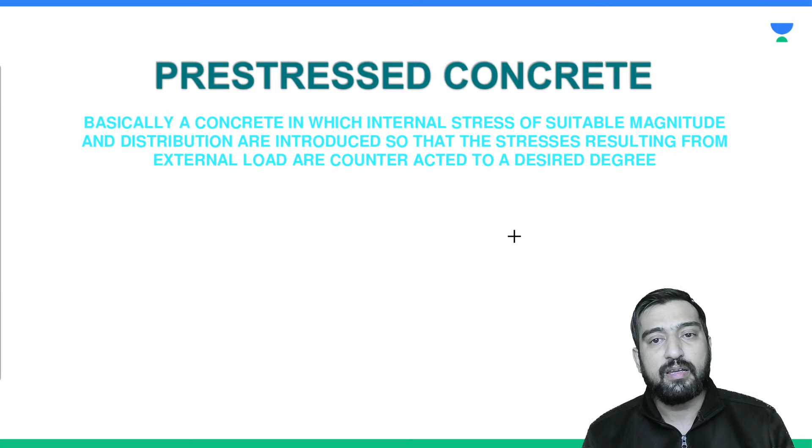So in order to resist such tension, okay, or you can say in order to effectively use your normal concrete, the concept of pre-stressed concrete is introduced. Already we are doing a pre-stressing in such a manner that even if the external loads come, the initial stresses are going to counteract up to a desired degree. So this is a concept here.

Now, why pre-stressed concrete when we have already our RCC structure? I told you, in RCC structure, in WSM as well as in LSM, the concrete in the tension zone is completely neglected. Yahi bataya tha bhi maine.

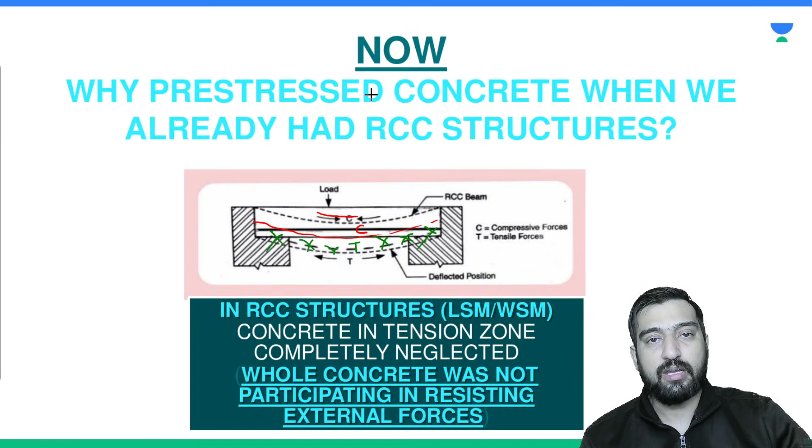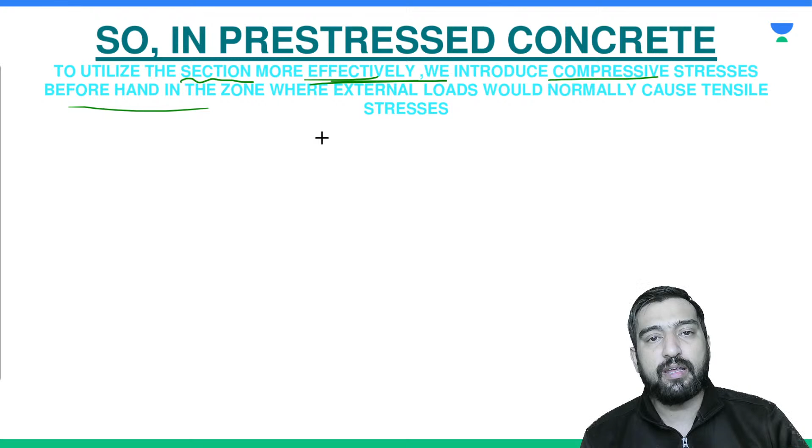I hope the concept is clear to you guys. Okay, so we can say that in pre-stress concrete, in order to utilize this section more effectively, we are introducing the compressive stresses initially, before the loading, where the external loads would normally cause the tensile stress. So we are going to compress that portion of concrete which would be in tension due to the external load. So by doing this, we are using our RCC in a more effective manner.

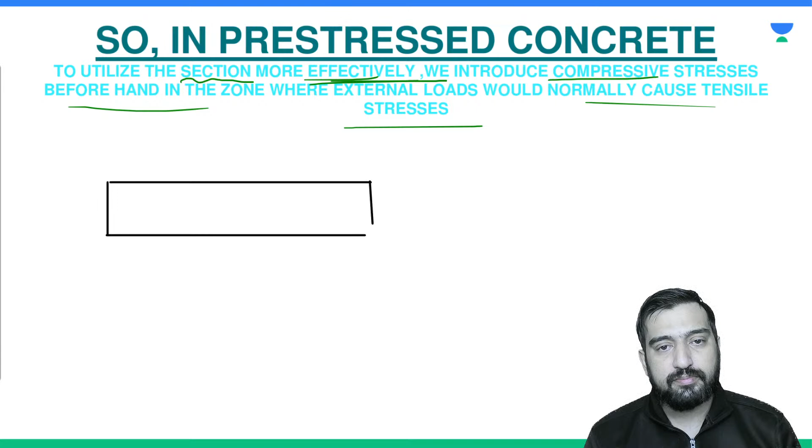So tell me if the basic funda of pre-stressed is clear to you or not. Aise samajh lijiye ki ye mere paas normal steel section, concrete section hai. Okay, already it is compressed.

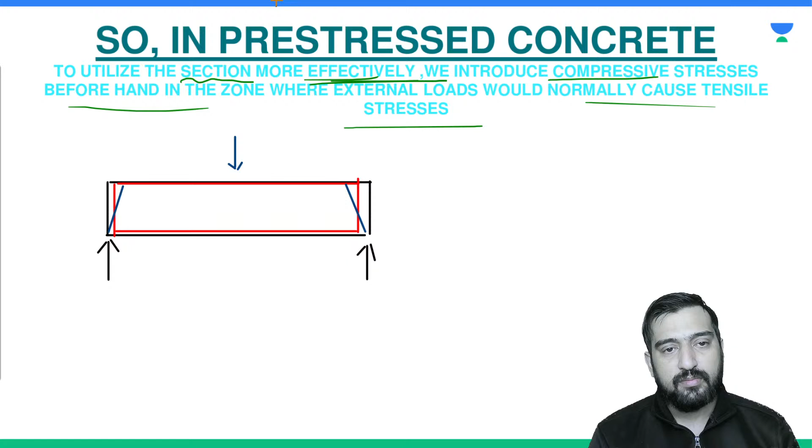So the revised position of this would be maybe like this. Okay, if I am going to compress it from the center, now when the external load came, so due to the application of external load, now the deflected pattern may be like this. So still it is going to reach at this level. So we can say that no net stresses are developed even now. So this is the beauty of pre-stressed concrete.

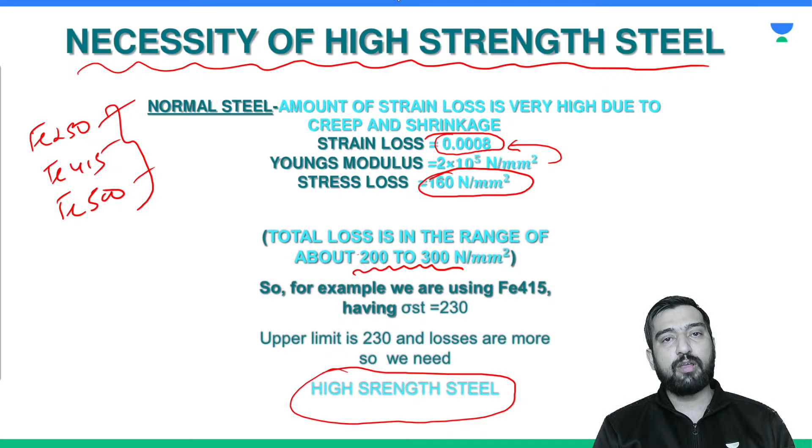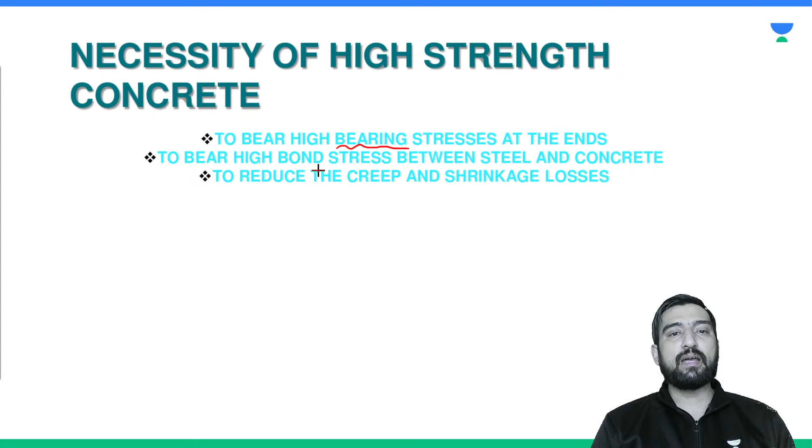So in order to bear the high bearing stresses at the ends, we need high strength concrete. To bear the high bond stress between steel and concrete, we need high strength concrete, because as we are increasing the grade of concrete, the bond strength also increases, the bearing stress is also increasing, and as the grading of concrete becomes higher, the losses due to shrinkage creep also reduce, because Young's modulus increases and the material which has high value of Young's modulus is less prone to creep and shrinkage losses. Okay, so to reduce losses due to creep and shrinkage, to bear high bond stress, to bear high bearing stresses, we will be needing high strength concrete.

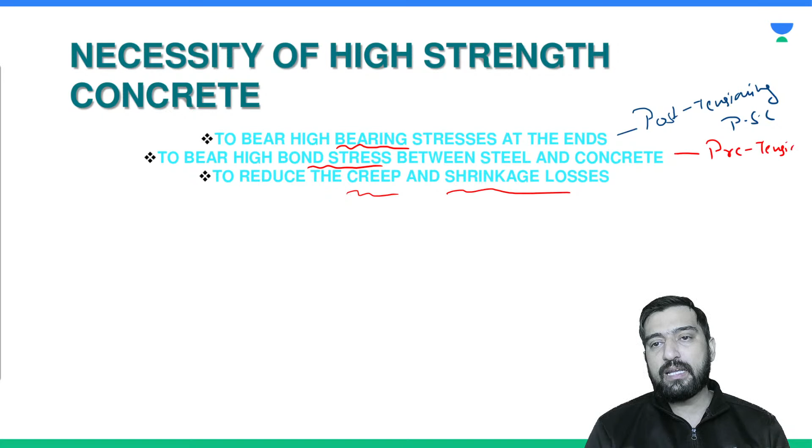पोस्ट टेंशनिंग में हम कंक्रीट कास्ट करने के बाद उसको स्ट्रेस देंगे, और प्री टेंशनिंग में हम कंक्रीट कास्ट करने से पहले ही ऐसा अरेंजमेंट करके रखेंगे कि मेरा जो कंक्रीट है उसमें स्ट्रेस आ जाए. आर यू गेटिंग द पॉइंट और नॉट?

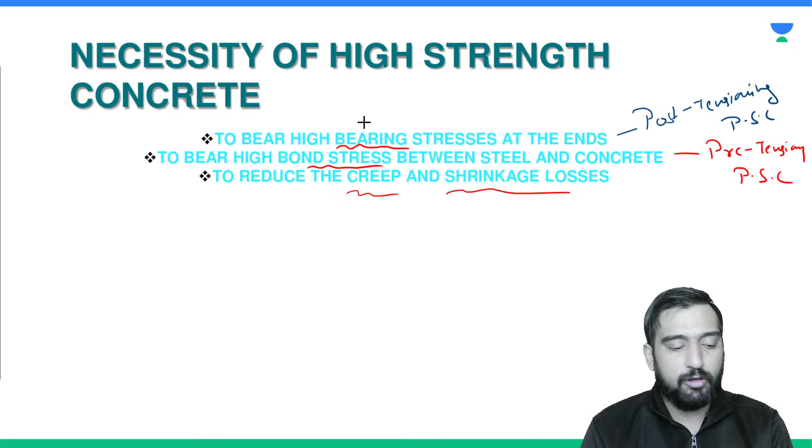ओके, सो लेट मी एक्सप्लेन यू द टाइप ऑफ प्री स्ट्रेसिंग. एज आई टोल्ड यू देयर आर 2 टाइप ऑफ प्री स्ट्रेसिंग. पहला है प्री टेंशनिंग प्री स्ट्रेसिंग, और दूसरा है पोस्ट टेंशनिंग प्री स्ट्रेसिंग. नाउ व्हाट इज द डिफरेंस बिटवीन प्री एंड पोस्ट? एज आई टोल्ड यू, प्री में आप पहले से ही कंक्रीट को टेंशन देने का प्रबंध करके रखोगे, और पोस्ट में आप कंक्रीट कास्ट करने के बाद उसको खींचोगे.

ओके, लेट मी एक्सप्लेन यू इन मोर डिटेल मैनर व्हाट इज हैपनिंग इन प्री टेंशनिंग. पहले आपने 2 एंड से वायर कनेक्ट करी, अब इस वायर को आपने दम के खींच दिया. देयर इज ह्यूज स्ट्रेन स्टोर्ड इन दीज स्टील वायर्स, ऑल्सो नोन एज स्टील टेंडन्स. सो नाउ आफ्टर स्ट्रेचिंग योर वायर, ये वायर कैसे स्ट्रेच करोगे?

आप इसको एंकर कर दोगे, या हाइड्रोलिक जैक लगा करके वायर खींचोगे, वायर को पुल दोगे, पुल करने के बाद इसको आप एंकर कर दोगे. अब ये वायर आपकी एकदम स्ट्रेच्ड है.

अब जब इसके ऊपर आप कंक्रीट कास्ट करोगे, इसके ऊपर जब आप कंक्रीट कास्ट करोगे, और कंक्रीट कास्ट मल्टीपल कर सकते हो, जितना बड़ा आपका प्लांट है उतनी लंबी वायर्स. एंड ये तो मैं आपको सिर्फ एक व्यू दिखा रहा हूं. देयर विल बी वायर्स बिहाइंड वायर्स बिहाइंड वायर्स. सो n number of sections you can plot in on a single batch.

So after casting the concrete, what you need to do, you need to cut this wire. If you are going to cut this wire, then what would happen? Steel will try to contract itself, and due to the good bond action between steel and concrete, the surrounding concrete also gets contracted and compressive stress is stored in your concrete.

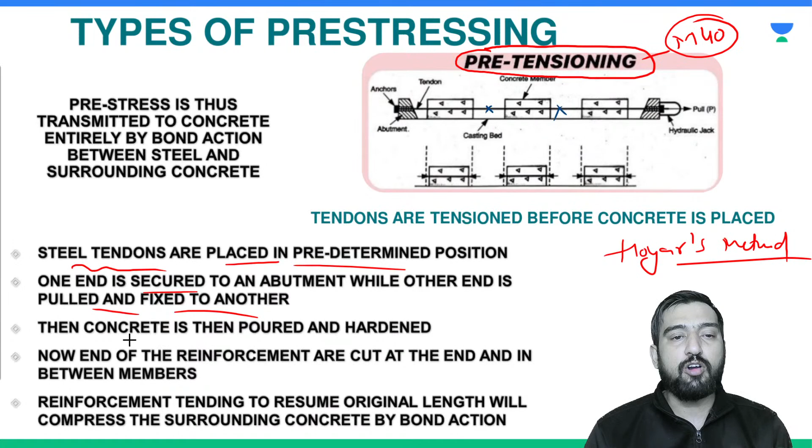Okay, so these are some salient points of pre-tensioning pre-stressed concrete. Here the steel tendons are placed in predetermined position. One end is secure and another end is pulled and fixed to another. Then after, the concrete is casted. So you can also define it pre-tensioning because you have stretched your steel wire before the casting of concrete. That's why tensioning procedure have taken place earlier than that of the casting of concrete. So that's why it is pre-tensioning, मतलब पहले से ही tensioning करके रखी हुई है.

So after pre-tensioning, your concrete is casted, then wires are cut, then they are contracted due to the good bond action. Okay, is it clear? So after this, the reinforcements are cut and then they are trying to resume their original length, and due to the bond action between steel and concrete, the surrounding concrete will be compressed by the bond action. So that is the concept here.

Okay. Now the procedure in post-tensioning pre-stressed concrete is different. From name itself it is clear that here first of all you are going to cast your concrete, but whenever you are going to cast your concrete you will be placing some space in between. How you can place a space in between?

आपने घर बनते हुए देखा होगा, आप क्या करते हो, होल करके जब लेंटर डलता है, जब छत डलती है तो आप पहले से ही इलेक्ट्रिसिटी वायर्स के लिए पाइपिंग वगैरह डाल देते हो. जब आप कंक्रीट कास्ट करोगे तो आप पहले से ही अपनी डिजायर्ड लोकेशन पे पाइप वगैरह फिट कर दोगे, एंड दीज आर नोन एज डक्ट.

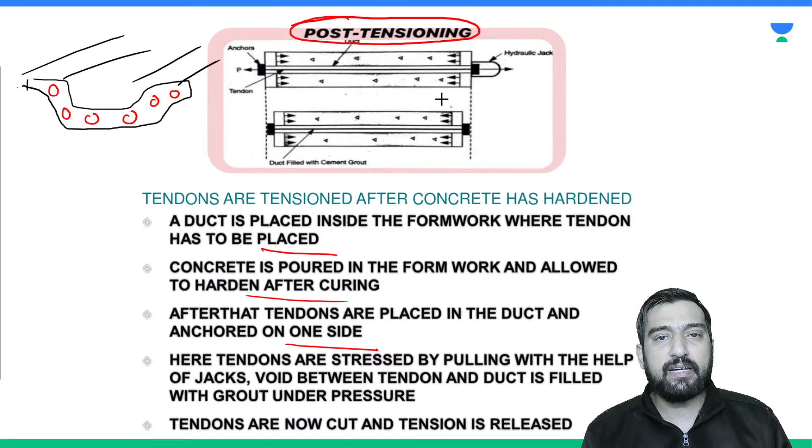So here, instead of M40, you can even plan for M30, because M30 is the minimum requirement here, since M30 also provides you the desired bearing strength. But in pre-tensioning, the entire game is set up based on bond action. So we need good bond, and bond stress generally increases, but it is not as high as bearing strength. That's why we use minimum M40 there, and the code has set M30 as the criteria in post-tensioning.

Is it clear to all? Ram Singh, did you get your example? Tell me.

So here the tendons are stressed by pulling with the help of jacks. Voids between the tendon and duct are filled with grout under pressure. After that the tendons are cut and released. This is the procedure of post-tensioning.

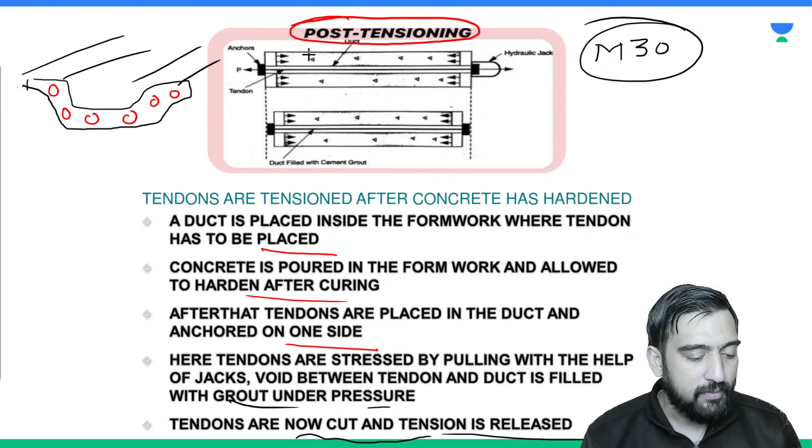So the key point is, in post-tensioning, wires are placed after the casting of concrete, and then we apply the tensioning process. Here, pre and post are relative with respect to the casting of concrete. If tensioning is done before casting, it is pre. If done after casting, it is post. So pre and post represent the time period, and the reference for them is the casting of concrete. Is it clear to everybody?

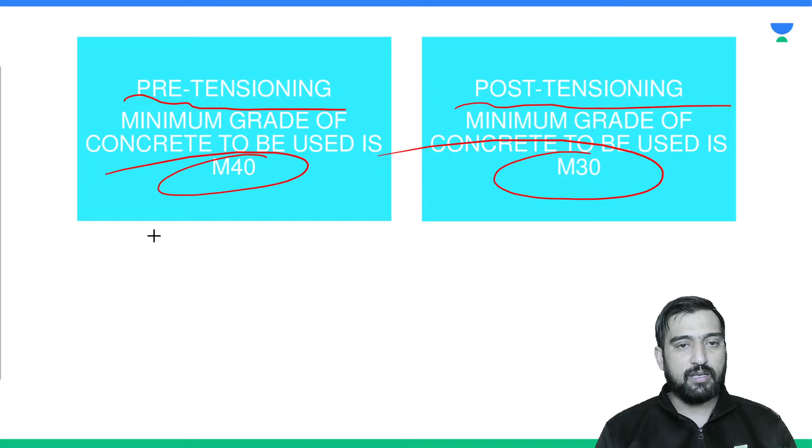Now, as I told you, in pre-tensioning we use M40, and in post-tensioning we use minimum M30. If somebody asks what is the minimum grade of concrete used in pre-stress technology, you can say M30. But if somebody asks what is the minimum grade of concrete in pre-tensioning pre-stressed concrete, then make sure the answer is M40. So read the question very carefully - this exact same model has been asked twice in the past.

Is it clear? Now, what are all the advantages of pre-stressed concrete? The very first advantage is it utilizes your cross section more effectively. In fact, most of the time the entire cross section is utilized, whereas in LSM and WSM, you have observed that the concrete area under the neutral axis in the tension zone is to be neglected from the strength point of view.

So that concrete is fully utilized here. If the entire concrete is utilized, then in order to resist the same load, less area of cross section would be required. If less area of cross section is required, it will reduce the weight of the structure, it will reduce the dead weight of the structure.

If the dead weight of the structure is less, then the cost of the supporting structure like your columns and footing will also be reduced.

And generally deflection is the challenge. We have seen in marathon session 2 that in slab and beam we do a deflection check. So normally we do not provide a very long span of a structure in RCC, especially in case of cantilever or simply supported.

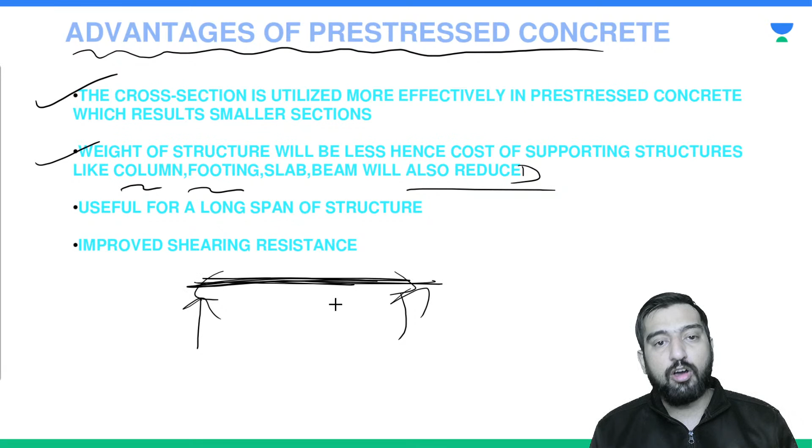You will see that the spacing between two pillars, two columns, is wider as compared to a normal RCC bridge, because here you can go with a longer span. Here you can go with a longer span.

Is there any other category to select minimum grade like mild, moderate, severe here as well? Ankit, yes, those things are mentioned, but for that we have to read a separate code, 1343.

That much is not part of our syllabus. In fact, I have also never been through that code.

But there should be, and we have to see the minimum grade as per the bond action as well as the bearing action. So from that, logically we can define why the value...

...of concrete is higher in pre-tension pre-stressed concrete rather than in post-tension, because in post-tension bearing is the criteria, and in pre-tension bond is the criteria.

Okay, chaliye. So it is also useful for long spans of structure, and also you can get improved shearing resistance.

It is also quite common. Like, suppose there are two objects. Suppose there are two objects like this.

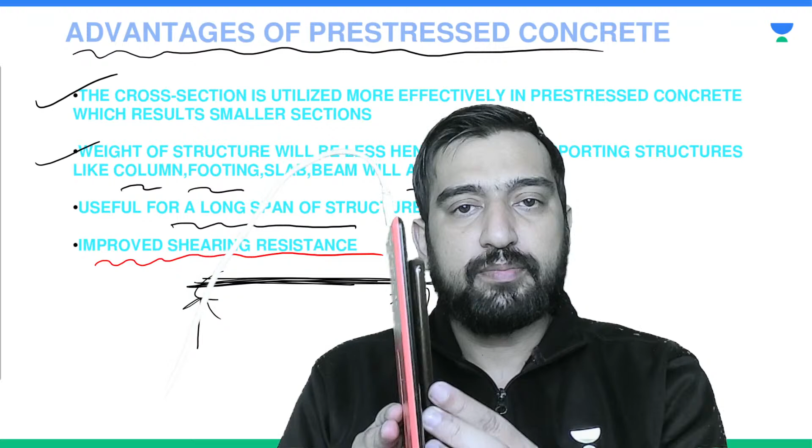Suppose there are two objects. You can see the relative displacement between two objects, if they are normally held together.

But suppose if both of these members are compressed now, I have applied a compressive stress here. Then do you really think now the relative movement is easier? So as you are increasing the compressive strength, then automatically the shear, the tangential displacement or relative displacement between two sections, it will also be improved.

So as you are increasing the grade of concrete, the shearing resistance increases. And in case of pre-stressed concrete, whenever there is confinement, the shearing strength would be more enhanced.

So that is the reason why we can say that pre-stressed concrete sections are more good, pre-stressed concrete sections are more good in taking shear.

You can also justify it from the Mohr circle, that in the first case it is like this, and now in the second case it is like this. So here you can see that the shear strength of the concrete member is more whenever it is already compressed. So that is the case.

So this is the advantage of pre-stressed concrete over RCC. Although I am not telling you the disadvantages, but disadvantages are also there.

Machines and tools are expensive, the labor we need is skilled. So all these are also disadvantages of pre-stressed concrete. Are you getting the point or not?

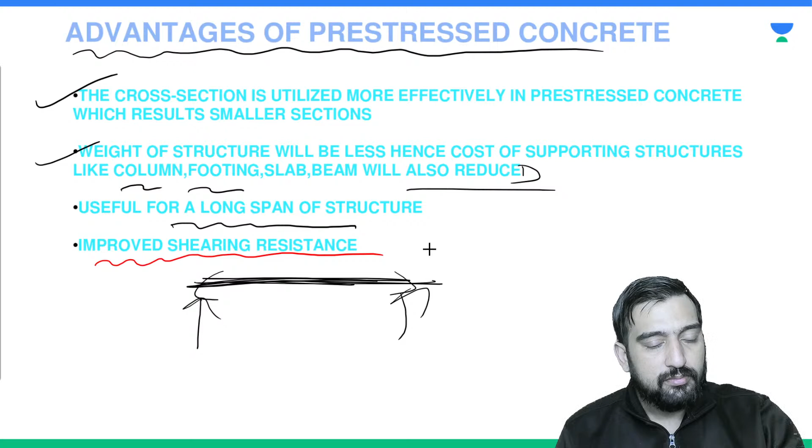Okay, now we have to start analysis. So this is the basic introduction. In the basic introduction we have covered what all are the advantages, what is pre-tensioning, what is post-tensioning, and why...

...do we need high strength grade of steel and concrete. So these things we have covered in the basic introduction portion.

Now for analysis, before starting we must be familiar with - sir, if we have to choose from pre or post, which one has more strength? Dear Ankit...

...not pre or post, we can say both are relevant, that's why both techniques are used very much. Okay, but it is...

...as per the project. Like, you can play more in post-tensioning pre-stressed concrete.

When I said you can play more, it means you will be able to counteract the stresses the way you want in case of post-tension pre-stressed concrete. That is why that is used. But whenever you need sections in bulk quantity, like I told you the example of railway sleepers...

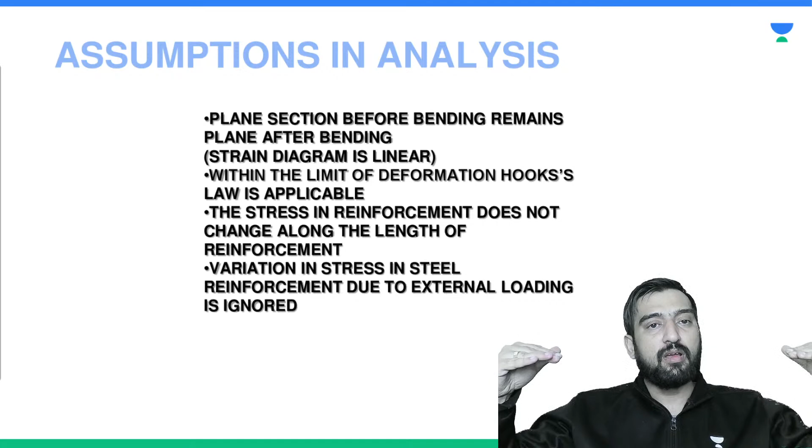Whenever you need a pre-stressed member in bulk quantity, you go for the pre-tension technique, because the tension is already there and you are casting the concrete, so you can get n number of similar members at once. But in pre-tension pre-stressed concrete, most of the time the wire is straight. In post-tension pre-stressed concrete, we can give the wire in the required shape. There is also an effect of shape - the difference is there whether you provide wires in a horizontal, triangular, or parabolic manner. They all become more and more significant. Such things you can easily do in post-tension pre-stressed concrete, that's why it is relevant.

It is also a function of the wire - how strong your wires are. Suppose I have a concrete which wants to compress, but the wires are not capable enough to produce that much compressive stress or strain. In that case the combination is ineffective. So not only on the basis of concrete, but as a system we have to judge which is going to give more strength. And anyone can give more strength, let me tell you.

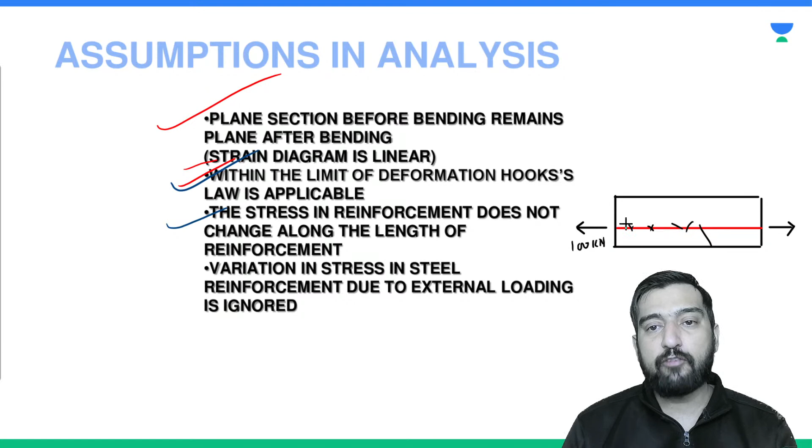and this is P, let's say 1000 or 100 kilonewton. So this 100 will not remain 100 here and here, because due to the frictional loss and many other kinds of losses, this value would be decreasing. If I am going to pull it from both ends, then this loss would be maximum at the center. If I am going to pull it only from one end, then this loss is going to be maximum at

the other end. The earlier case is known as jacking from both the ends. This case is known as jacking from single end. But assumption says that if it is 100 applied here, then we have to consider it same at each and every position. And one more thing, whenever you are going to apply a load here,

it is going to deform. If it is going to deform, then what happens? This wire would be stretched. Due to the stretching of this wire, again there is some gain of strain, and due to that gain of strain, gain of stress may also be there. Anyway, we are also going to ignore that.

So same thing they have written, that the variation of stress in steel reinforcement due to external loading is ignored.

Nowadays precast buildings are being constructed in some cities. If this pre-stressed concrete has to do something in such kind of construction.

Yes, Ram Singh. Generally they use beams of pre-stressed concrete. Precast buildings are just like your steel sections. You already had rolled section in your factory, and on site you are only doing assembling. So this precast buildings are also taking the help of pre-stressed concrete.

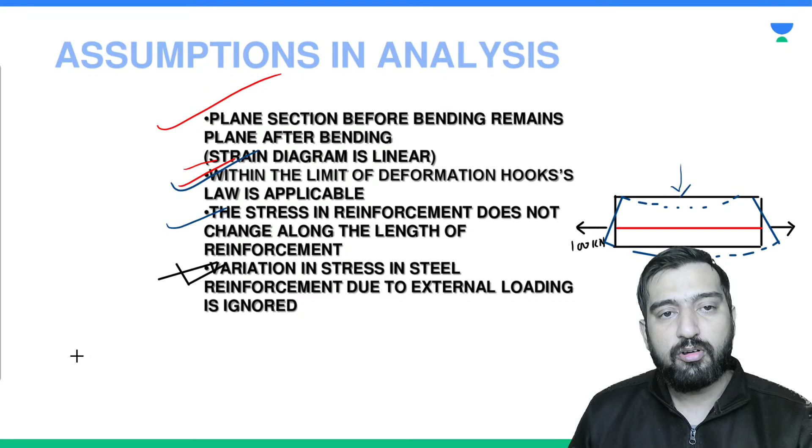The designer will ask that I need a beam of this much capacity of this size. So they are simply preparing those individual segments at some other location based on your request, based on your dimensions and all, and you are simply assembling them or keeping them at your site. This is just to increase the rate of construction or reduce the pollution involved or reduce the disturbance to the surrounding. Is it clear?

So now the analysis method. Total there are three types of analysis. One is stress concept, another is load balancing concept, and third one is P-line C-line method.

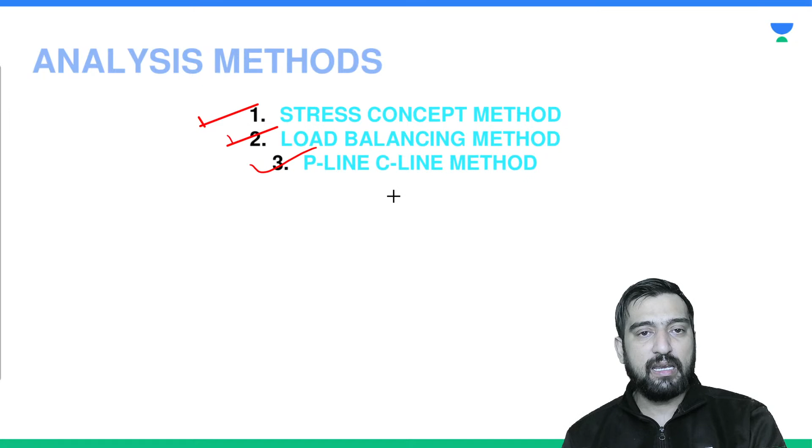I will suggest you go for all these three methods. But anyway, if you have to select any one method that you want to learn analysis only by a single method, then I will recommend you to go for load balancing concept.

Stress concept you all know. I taught you in column, in SOM as well, how to deal with the stress concept, but instead of load, here the moment would be generated due to the pre-stressing force. Also try to learn the load balancing concept here, and P-line C-line method also we will be seeing.

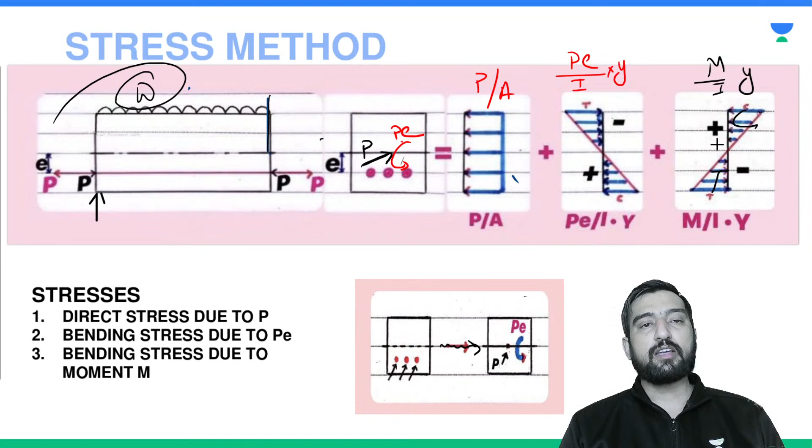So now when you have to obtain the net stresses due to all pre-stressing as well as dead load and live load, you can check the final stresses at top and bottom fiber by this expression: P by A minus plus Pe upon I into Y, and due to bending moment it is plus minus M upon I into Y. This minus plus or plus minus is with respect to this diagram, because tension is there due to pre-stressing force above the neutral axis and compression is there due to the external load above the neutral axis. So compression is plus here and tension is minus here. Below the neutral axis, compression is due to pre-stressing and tension is due to external load. So these are the final stresses at top and bottom fiber.

Okay, so this is the case. Now the second concept is the load balancing concept. From the name itself it is clear that here we are going to balance load. The changed eccentricity of your wire is going to be compensated with the help of an equal, or balanced, load. So how are you going to rectify this eccentricity? First of all, stretch your wire and make it horizontal.

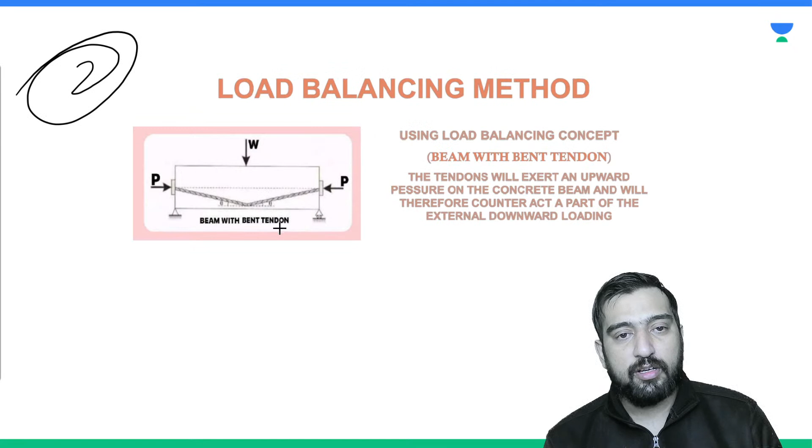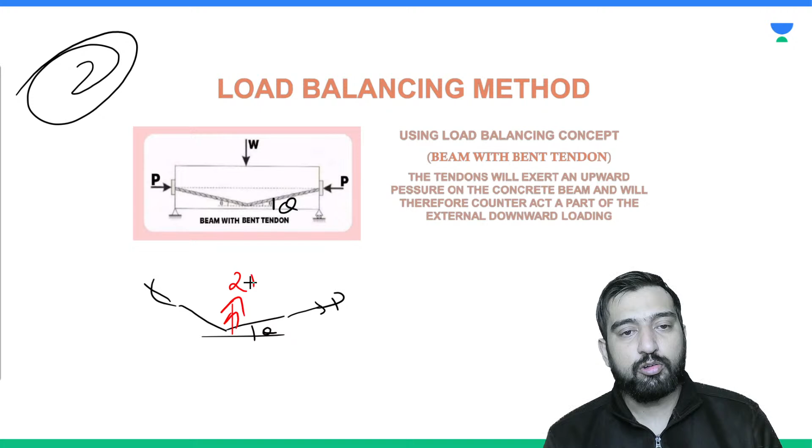What is 2p sin theta? If this angle is theta, and here it is p, and here it is p, then from mechanics this force is p sin theta, and from here as well this force is p sin theta. So total it is p sin theta plus p sin theta, which is 2p sin theta. So if you are going to make this wire straight, an equivalent load of 2p sin theta is going to come.

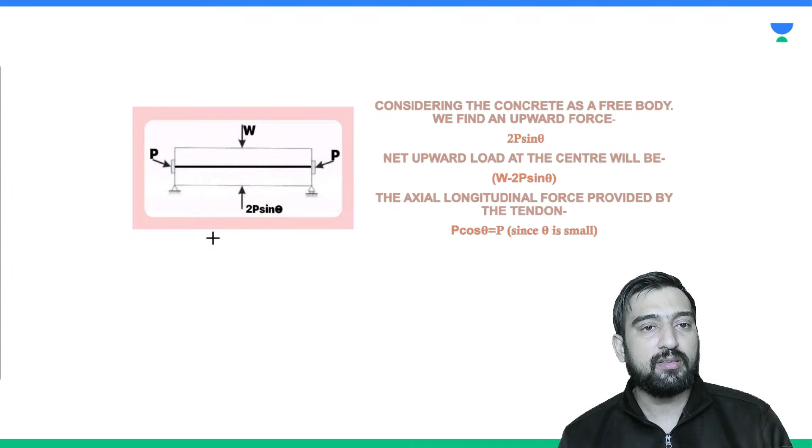So now, what you have to do is repeat the same procedure as in the stress method. But whenever you are calculating the external load now, earlier you were calculating the bending moment only due to external load, but now also account for this 2p sin theta in your external bending moment, and the rest of the procedure is the same.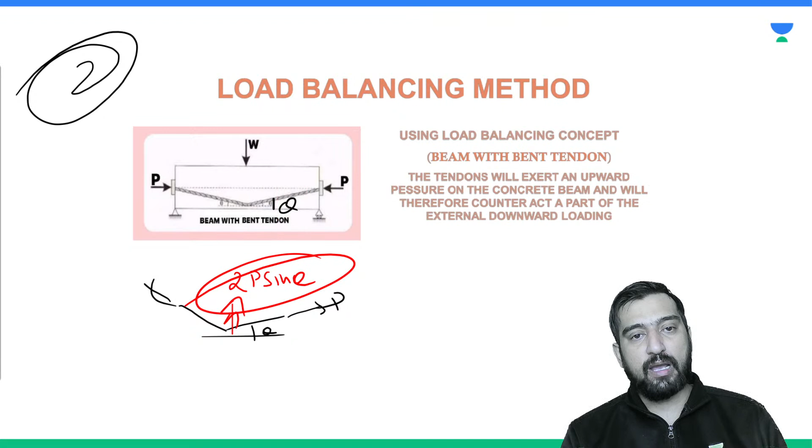So you may ask, sir, what is the benefit of this method? The benefit is, if it is a triangular profile and you analyze it with the stress method, the eccentricity keeps changing cross section by cross section. But when you make this profile straight, you get rid of eccentricity. Only this 2p sin theta, a vertical load, accommodates with the external load, and you will be able to calculate the net bending moment, and the rest of the procedure is the same.

But suppose if it is a parabolic variation instead of triangular, then in order to make this parabola horizontal, you need to provide an upthrust in the form of UDL. So it is very easy.

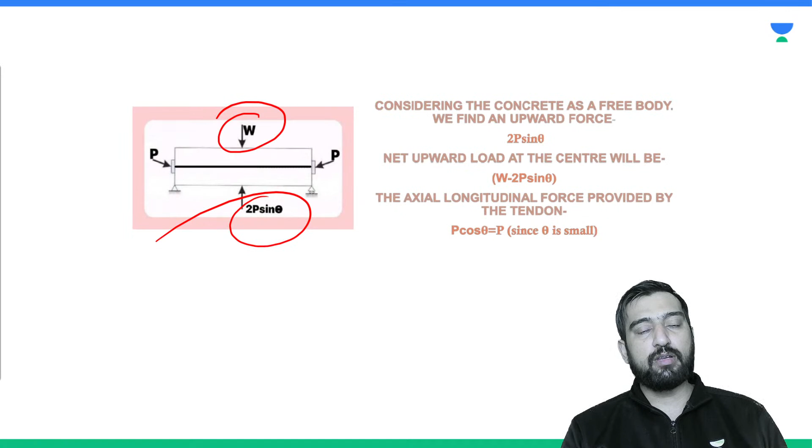Like for a point load, we have a triangular bending moment diagram. So if you are going to remove this bending moment, you need to apply an equivalent load. Like for a UDL, we have a parabolic bending moment diagram. So if the parabolic profile is to be removed, you have to apply some UDL. So what should be the intensity of this UDL? It is also very easy to calculate.

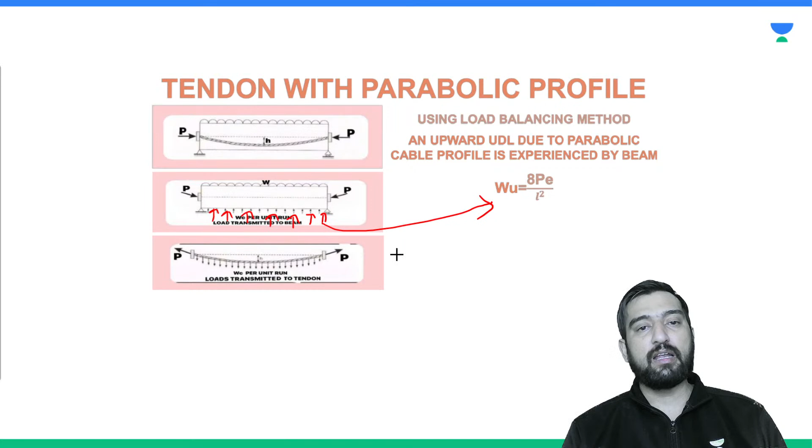Suppose if this is a UDL, what is the maximum bending moment it would produce? It would be WL square by 8. Suppose it is going to compensate your P into e. So what is your P into e? This is going to be the bending moment due to the external pre-stressing force.

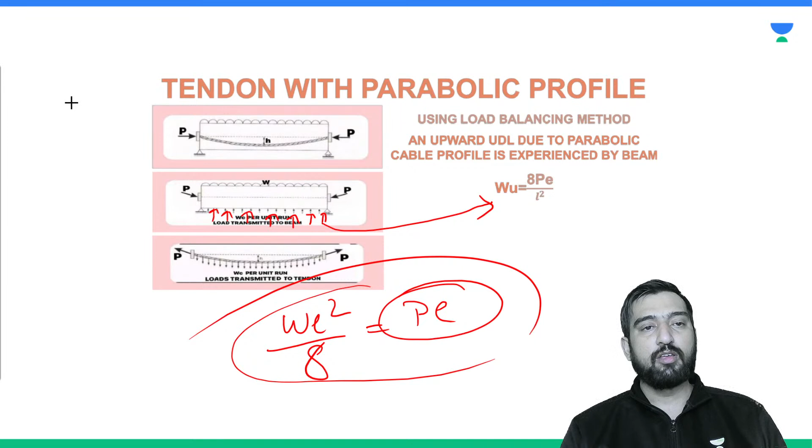So for the limiting condition, both have to be the same. So W comes out to be 8PE upon L square. This is the way to find the intensity of UDL from the load balancing concept if it is a case of parabolic profile.

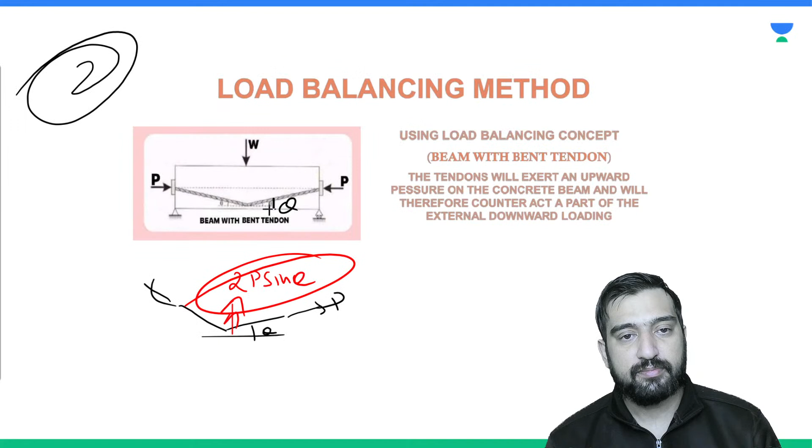In a triangular profile, it is simply 2P sin theta, where theta is this constant angle. But if the angle is not constant and the profile is parabolic, this parabolic profile can be considered straight, and you have to apply some UDL here, and the intensity of that UDL is 8Pe upon L square. So this is the second approach.

Now the third approach is the P line C line method. It's also a very interesting method, and generally we use this method whenever we have to draw the locus of a point. In the P line C line method, P line is known as the cable line and C line is known as the pressure line.

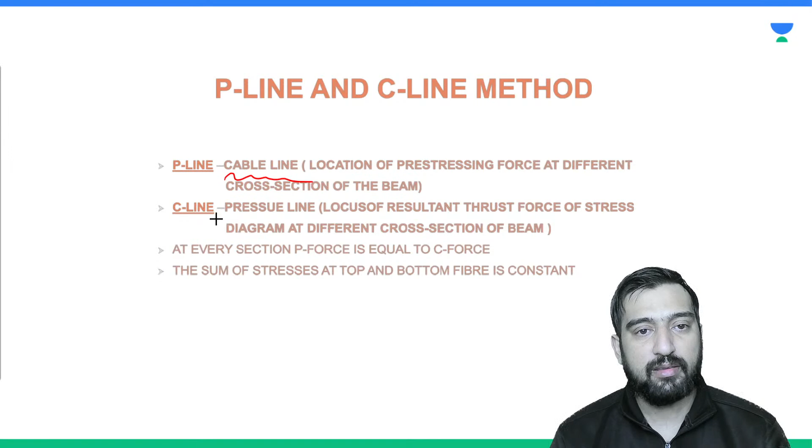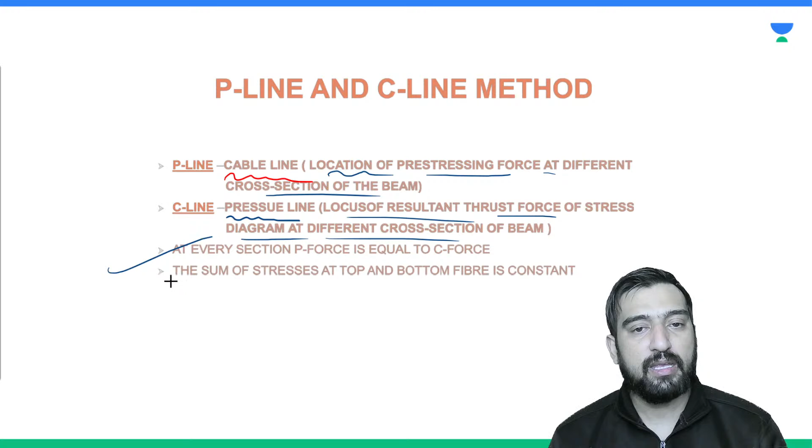P line is basically the location of the pre-stressing force at different cross sections. C line is the locus of the resultant thrust force at the stress diagram at different cross sections. So at every section, P and C forces are the same, only then can you maintain the equilibrium. And if you sum the stresses at top and bottom, it is going to be constant.

These two points are also applicable for the earlier method. The sum of top and bottom stresses are constant even in the earlier method as well.

So what is happening here in the P line C line method, let me simply tell you. Suppose this is your cross section, listen very carefully, and let's suppose this is your centroidal axis, and suppose this is your steel, this is your steel.

First of all, suppose P and C are transferring here, so in this cross section, find the location of the force which is going to balance it, so that you can calculate on the basis of bending moment. If you divide that moment by the C force or P force, you get an X. So let's say your X is here.

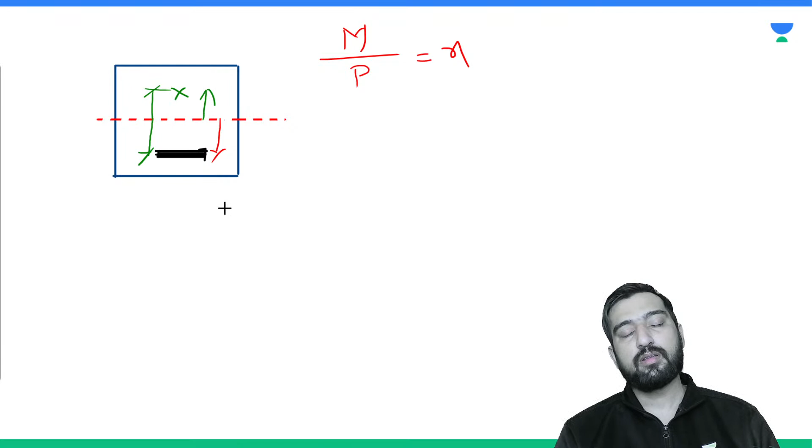In earlier methods you used the eccentricity, but now in this method you have to use the eccentricity of this compressive thrust. So let's suppose this is a compressive thrust C, and it has an eccentricity of E dash.

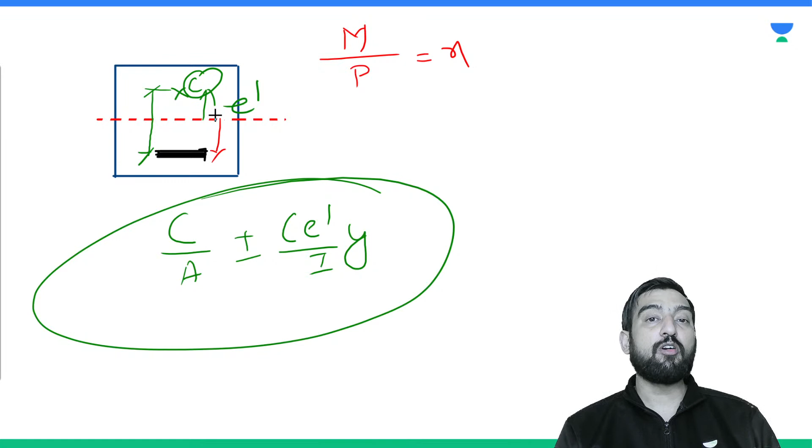Now what is the effective stress? It is C upon area, which is equal to P upon area, plus minus C times E dash upon I into Y. No need to calculate the external bending moment, because you have already calculated X as per the external bending moment.

This M is the external bending moment, and it is due to your given load, dead load and all. So accordingly, you have changed the direction of the lever arm and recalculated the value of your eccentricity.

So with respect to this zone, now you are working in the compression zone. If you calculate the value of E dash at different cross sections, you can also locate the locus of points through which compressive forces pass. So this is your third approach.

Now my dear friend, losses. For this I do not have a PPT right now, but I can explain the various types of losses in pre-stressed concrete.

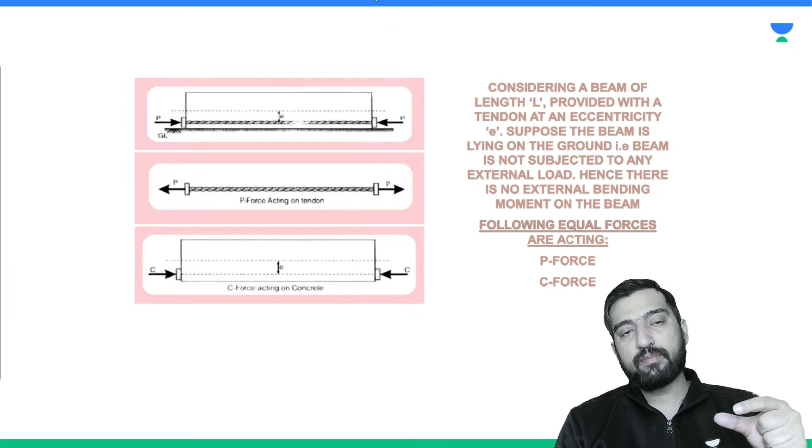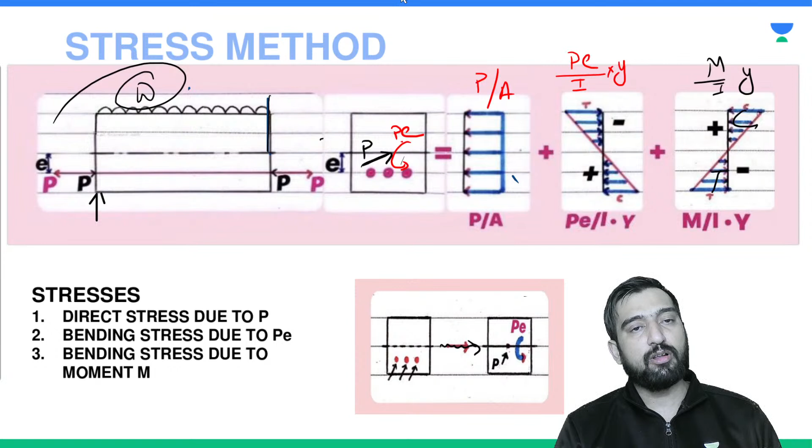One advice: try to attempt at least two problems using all three methods. Take the same numerical and try to solve it by all three methods - P line C line method, load balancing method, as well as stress method. Use the same question across all three methods, so you will automatically be able to differentiate between the exact mechanism of these processes.

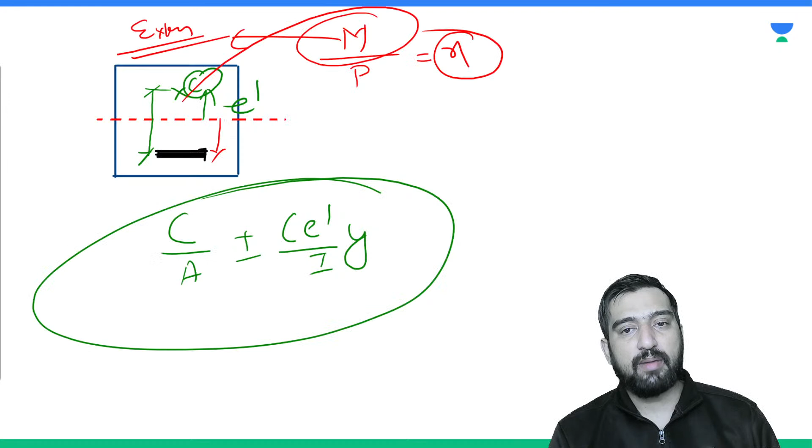So now, P line C line method, oh sorry, losses in pre-stress. What are the various losses in pre-stress? First one: losses due to friction. Second, losses due to anchorage slip,

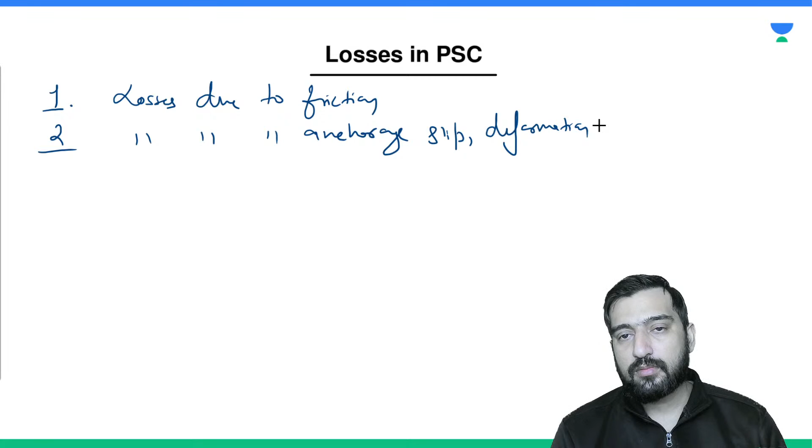deformation, etc. Third one is losses due to elastic shortening of concrete. Fourth one, losses due to creep of concrete.

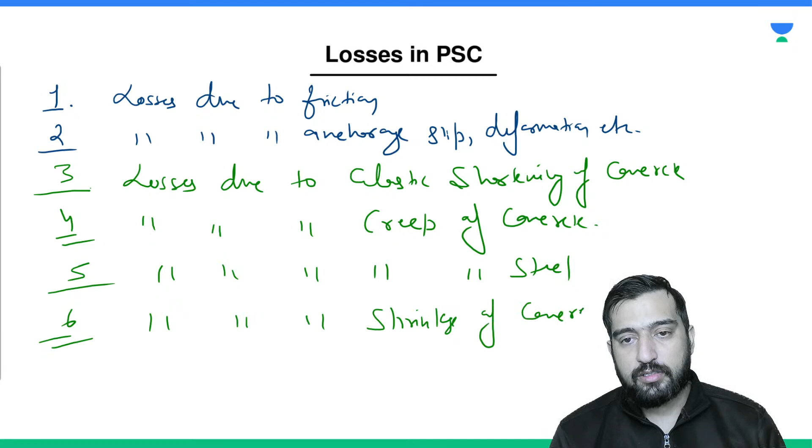Fifth one, creep of steel. Sixth one, shrinkage of concrete. Steel will not shrink, shrinkage is a surface property. So friction, anchorage, elastic shortening, creep of steel, shrinkage - these six are the major causes of the losses in pre-stress concrete.

So why have I made this green color and this blue color? Because this green color loss happens in pre-tensioned pre-stressed concrete. Also in post-tensioned pre-stressed concrete. It is both pre-tension as well as post-tension.

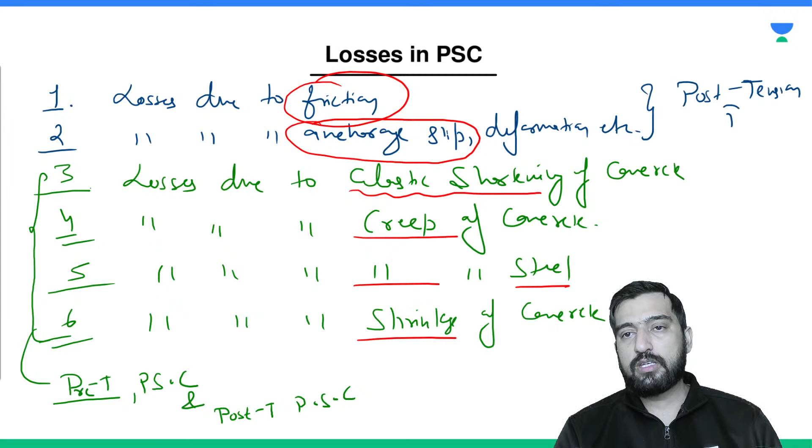But this blue loss only happens in post-tensioned pre-stressed concrete. So if I am talking about the total number of losses, it is more in post-tension pre-stressed concrete than in pre-tension pre-stressed concrete. But if I am talking about the magnitude of losses, the magnitude is more in pre-tension concrete.

The losses due to elastic shortening of concrete and creep are higher in magnitude compared to post-tension pre-stressed concrete. So once again, the number of losses are more in post-tension pre-stressed concrete, but the magnitude of losses is more in pre-tensioned pre-stressed concrete.

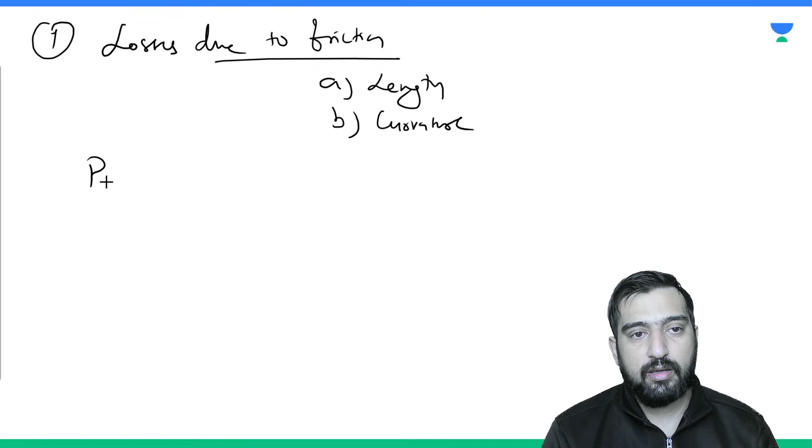Now, loss due to friction is the loss which occurs during the tensioning process. This friction loss is basically due to two factors: first is length and second is curvature. So there is a combined formula to calculate losses due to friction, which is initial pre-stressing force into kx plus mu alpha.

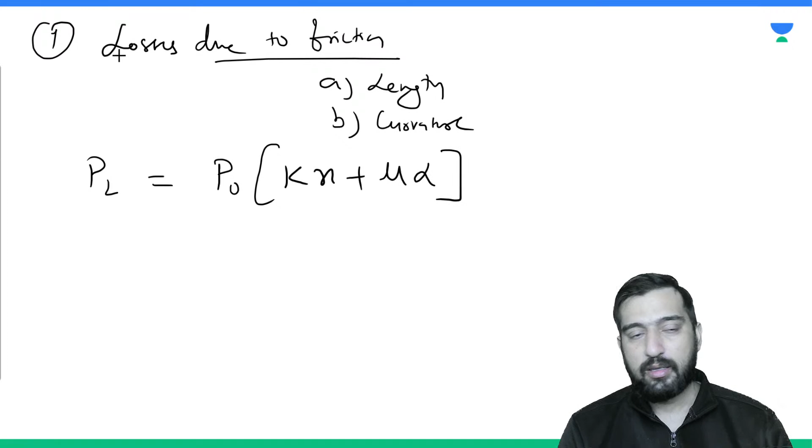Mu is known as the coefficient of friction, alpha is the change in slope.

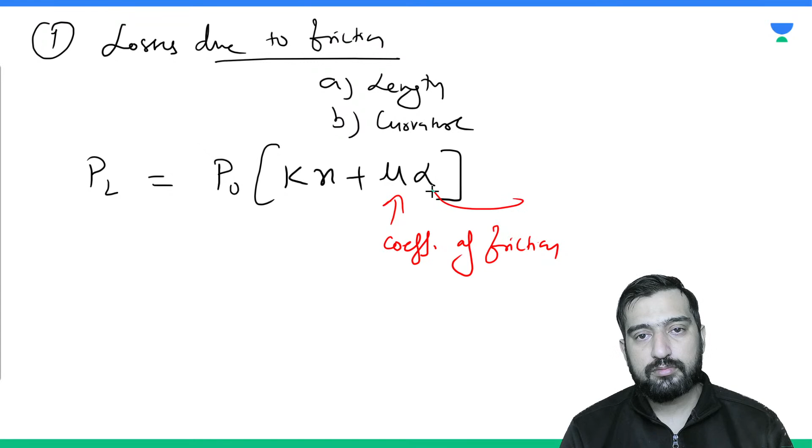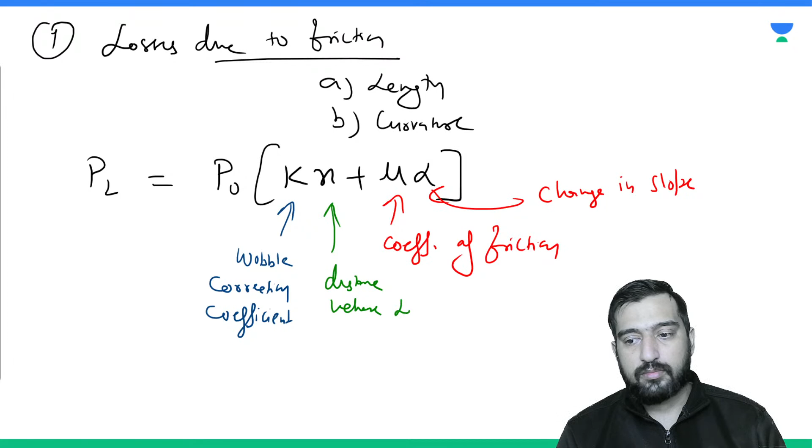Wobble correction coefficient. And X is the distance where the loss is being found out. And P naught is obviously the initial force, the initial pre-stressed force.

Next, I'm not going into the detail of this terminology - what alpha is, on what factor alpha depends - but this alpha is also going to change and X is also going to change depending upon the jacking condition. Sometimes we pull our wire from one side and sometimes from both sides. If pulling is done from both sides, then maximum loss happens at the center, so X maximum value is L by 2.

If pulling is done from both sides, the change is with respect to the center, so change in angle is with respect to one center. But if pulling is done from one end, then the maximum value of X is L, because it can happen maximum at a distance L. And if pulling is only from one side, then the angle change can be with respect to this tangent - it can be 2 alpha and so on. So variations can be there like that.

This thing is never asked in the exam. The wobble correction factor, you can see its value changes when the base is different, when medium is different - on all these parameters this value depends. Yes, but it is important for engineering services.

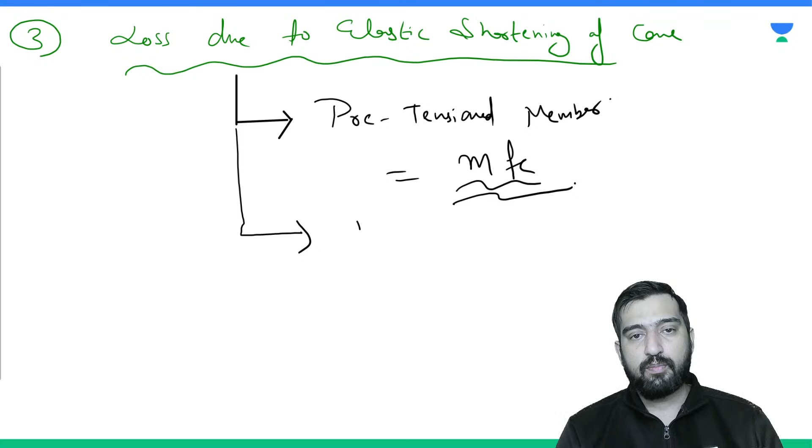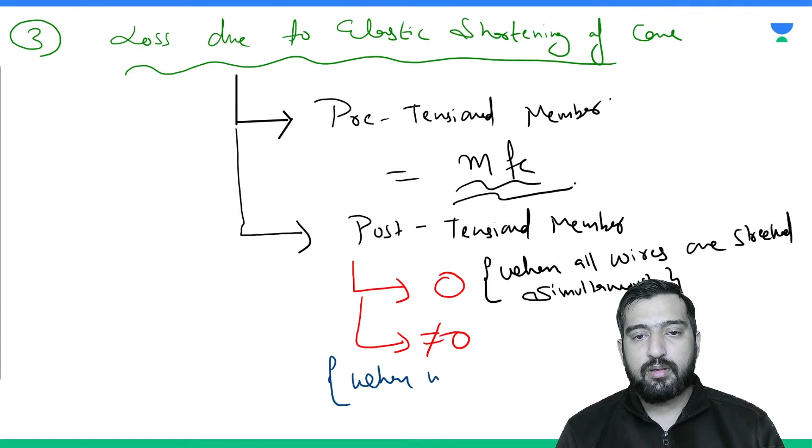But if we are talking in terms of post tension, it can be even 0, or it can be not equal to 0. It is 0 because when all wires are stretched simultaneously, and it is not equal to 0 when wires are stretched one after another. So those are the cases.

So this is the elastic shortening of concrete. Next is loss due to creep of concrete.

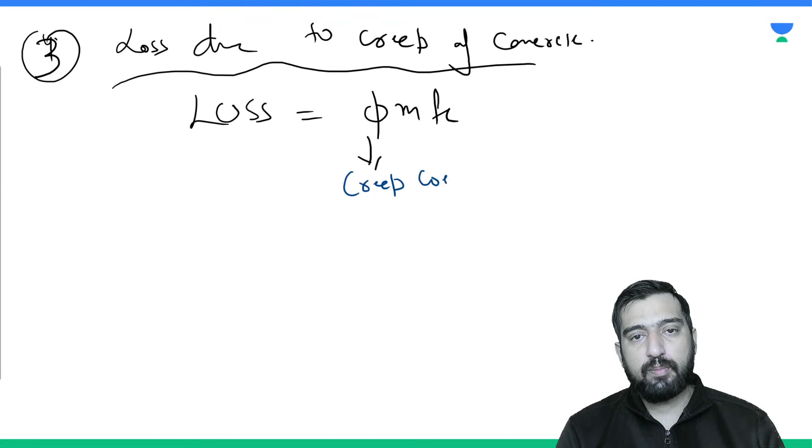This loss is equal to phi times of mfc, where phi is the creep coefficient. Creep coefficient I also explained in lecture number 1 of the marathon. It is creep strain upon elastic strain.

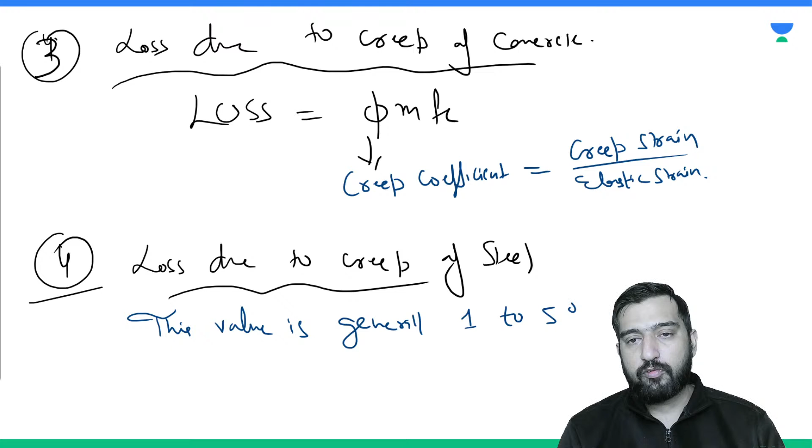And the fourth one is loss due to creep of steel, and this value is generally 1 to 5% of initial pre-stress.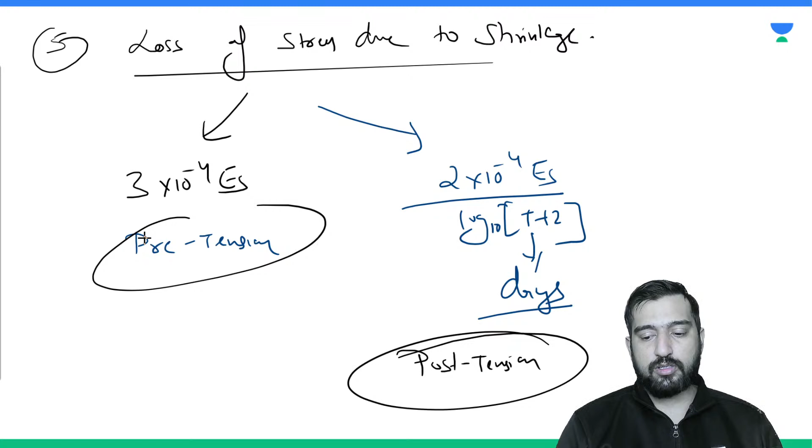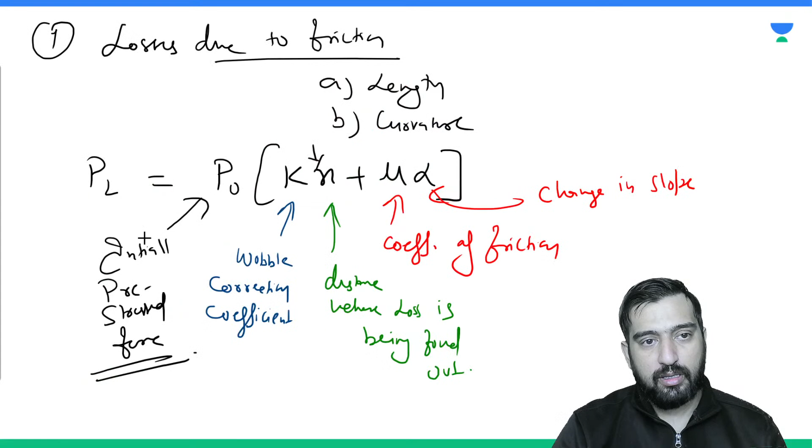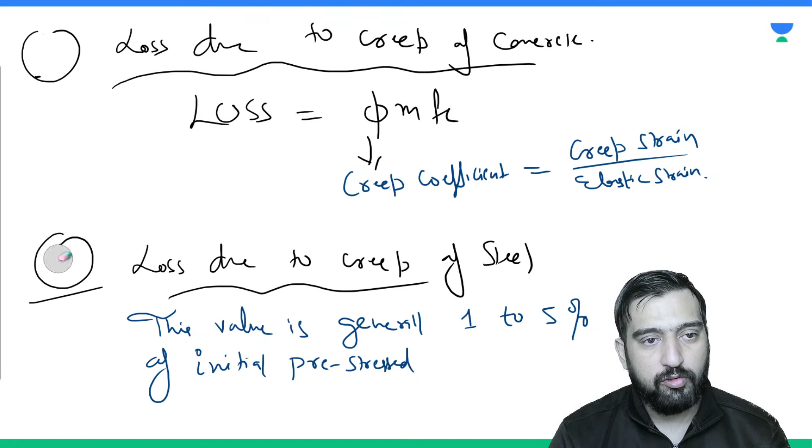So total these 6 categories of losses are there: shrinkage of concrete, creep of steel, creep of concrete, loss due to friction, loss due to anchorage, and loss due to elastic shortening. This is the fourth one, this is the fifth one, and this is the sixth one.

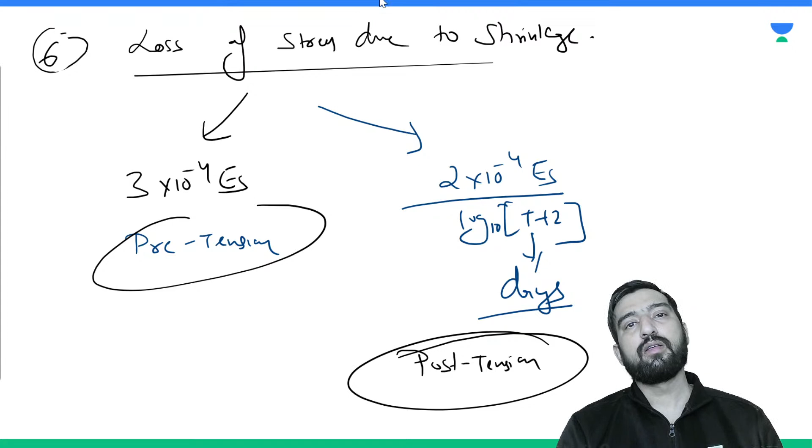Remember, the number of losses are more in post-tension pre-stress concrete, but the magnitude of losses is less in post-tension pre-stress concrete. So this can be the key. These are all the various types of losses. Is it clear to you?

So GATE has asked only questions on this so far, but the remaining topics are useful for your ESE prelims as well as ESE mains. So dear, we will be keeping it only up to here.

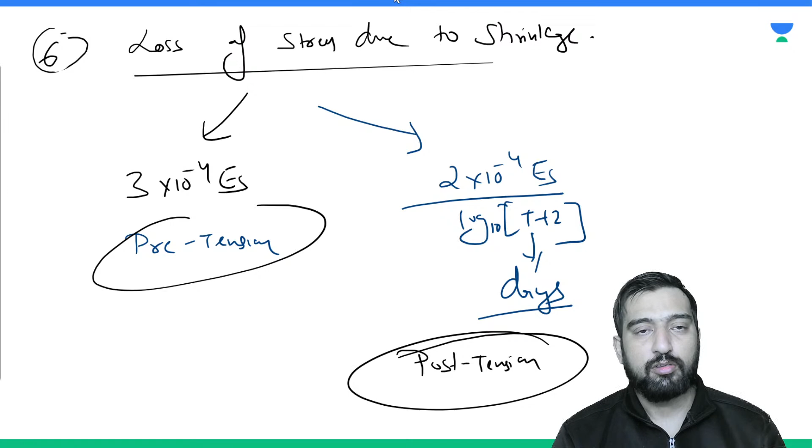I hope this marathon session will also be useful for you in revising your pre-stress concrete fundamentals. I have covered almost all the topics excluding numericals, I agree I haven't covered that.

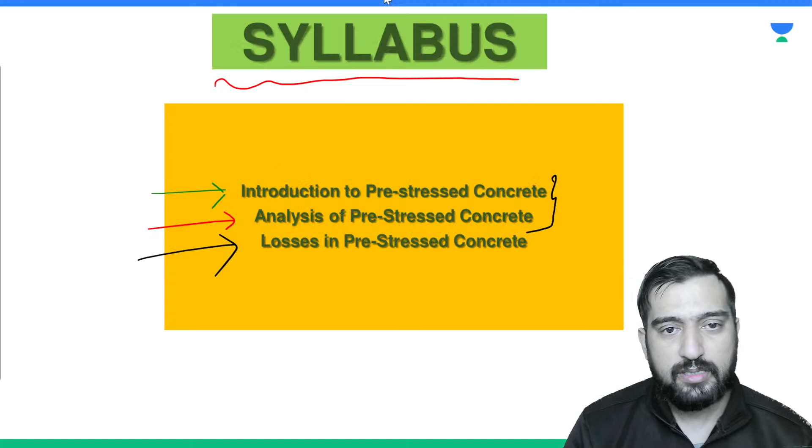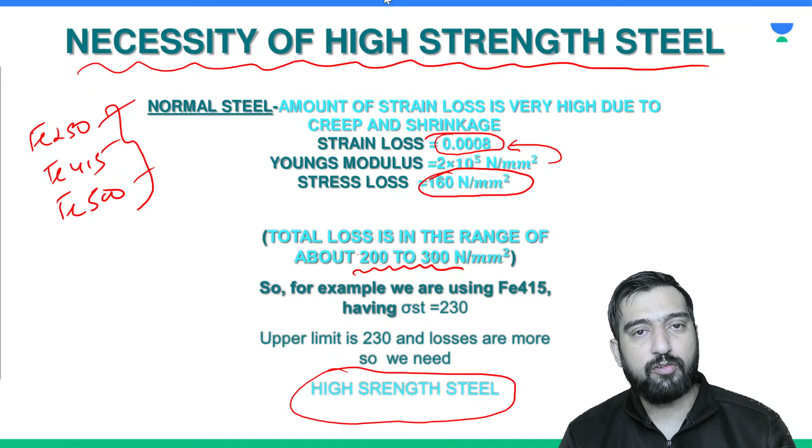So just a quick recap. We saw the introduction of pre-stress concrete, then why pre-stress concrete and what is the benefit of pre-stress concrete, why do we need high strength steel and why do we need high strength concrete. Then two types of pre-stressing we have seen, pre and post, their pros and cons, and minimum grade requirement in pre as well as post. The criteria in pre is bond, whereas in post it is bearing.

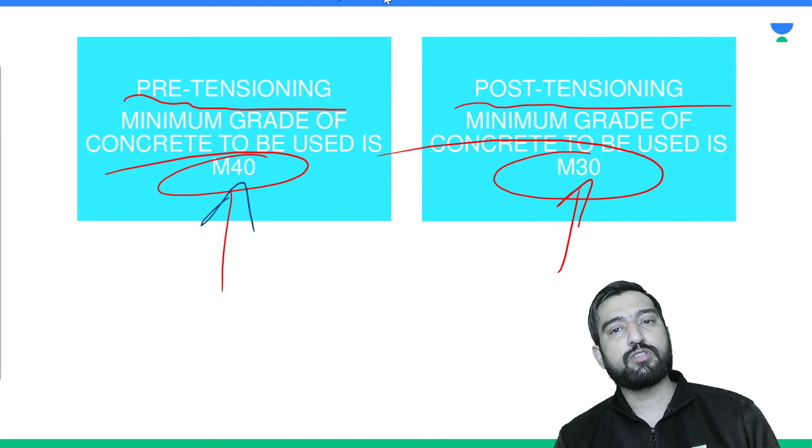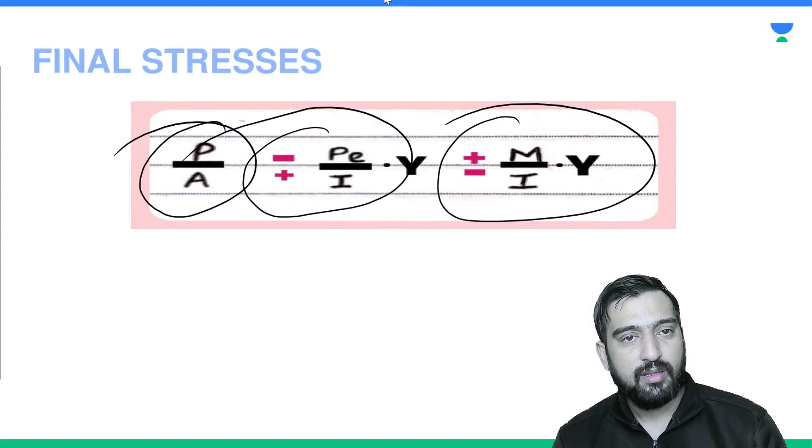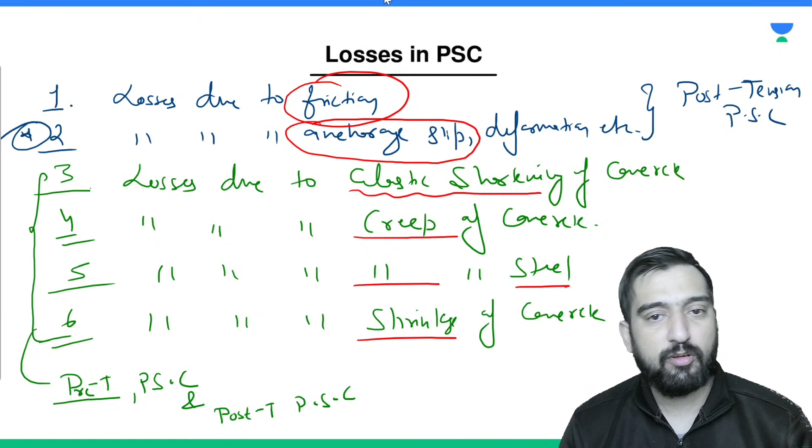What are the advantages of pre-stressing concrete? Assumptions in the analysis: three methods - stress method, load balancing method, and P line C line method. Then finally losses - total 6 cases, out of which the first 2 are only applicable for post tension, whereas all 6 are applicable for post tension. So we will be keeping it only up to here.

So let's finish it here. Try to watch it along with the RCC marathon. You can consider it the third marathon of RCC, isn't it?